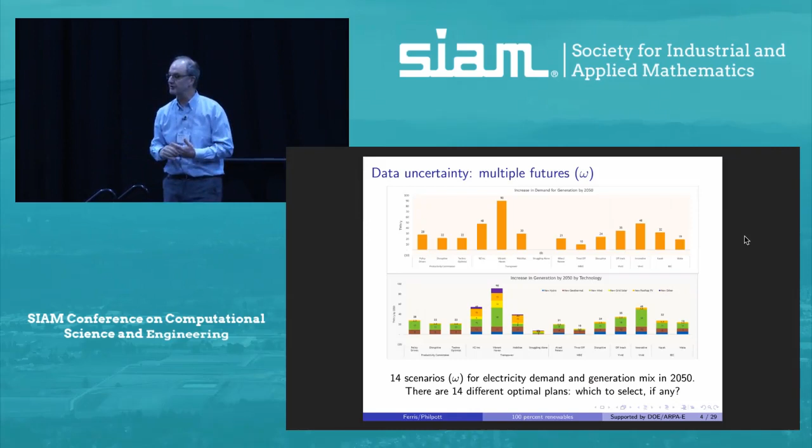Which one should we use? Well, my claim is that we should use none of those, but we should use mechanisms that essentially hedge against our uncertainty and take some portfolio of investments -- investments actually determined by an understanding of those multiple futures. And I'm going to use some techniques in stochastic programming to do that.

Second thing is, we don't know the data for 2050. We can estimate that data. What does the question mean? What does fully renewable mean? Before I talk to you about that, I'd like to first explain the picture on the bottom.

The context we were doing this in was New Zealand. You probably know that New Zealand is made up of two islands. There's the node S, which is the South Island -- the place you should go if you're a tourist, really nice, very green and hunky-dory. There's the Cook Strait, a bunch of water between the South Island and the North Island. Unfortunately, the North Island is where most of the people are -- about 40% live in Auckland.

Most of the electricity supply is a hydro electrical system on the South Island, so you have to get the water delivered from this large hydro system from the South Island to the North Island. The node H, you could think of as halfway -- it actually refers to Haywards power station, but it's across the strait. The orange lines are a simplified description of the transmission line network, corresponding to the places with the most congestion, because they have to run lines under the water between the islands, and there are other problematic lines between Haywards and the North Island.

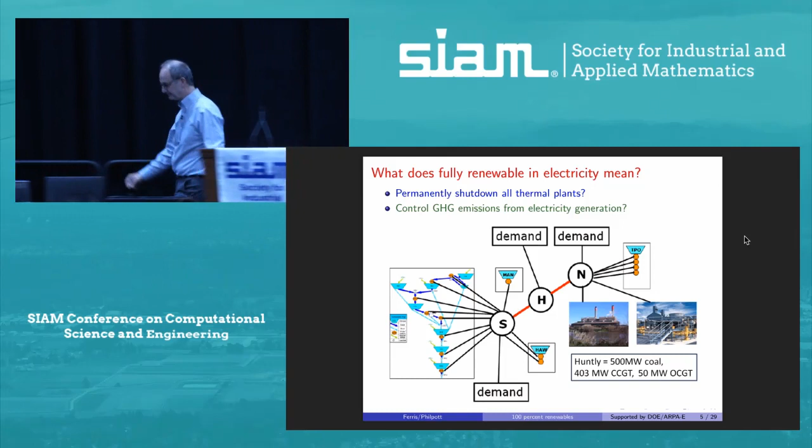So 100% renewable, well, we know what that means -- we want to get rid of these things. If we went 100% renewable, closing down all of the dirty plants is the same as closing down all of the emissions. However, if we want to go partway there, then these things would be different, and maybe they're different anyway. That's the question I wanted to address first in this talk. The first point I want to make is: because of uncertainty, closing down plants is not the same as reducing emissions.

So there are three pictures here, and the key point to understand is that hydro is like a huge battery. If we store the water, we can release it at a later date, and that's like storing potential energy from one time to another. So hydro is like a big battery.

Because of the uncertainty in inflows, there's a possibility of a really long dry winter. Because of the uncertainty in inflows, as well as demand, we might need to hedge. We need to maintain artificially high levels of water in the summer so that if we get a dry winter, we still have a reliable way to generate electricity.

So in the three pictures, the one on the left is full Huntly, where we don't shut down any of the plants. The middle is where we shut down the coal, and the far right is the picture when you've shut down all of the non-renewable technology.

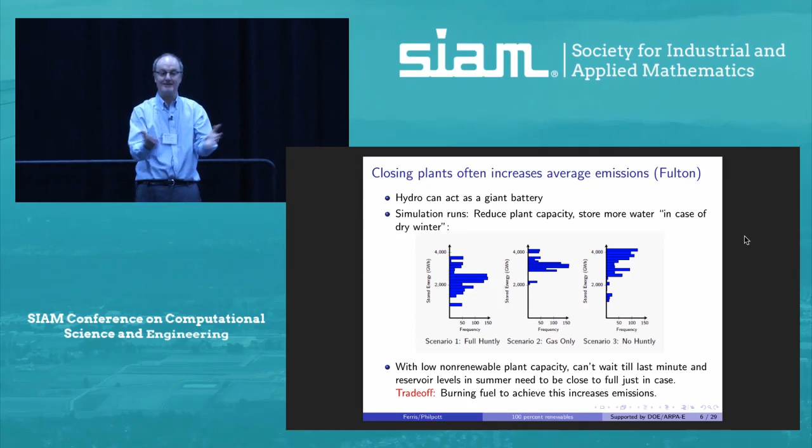The problem is, if you store water over the summer, that water isn't available to generate electricity. So you use your reduced dirty coal and gas over the summer to keep those levels artificially high, using the reduced capacity more frequently and ending up with more emissions.

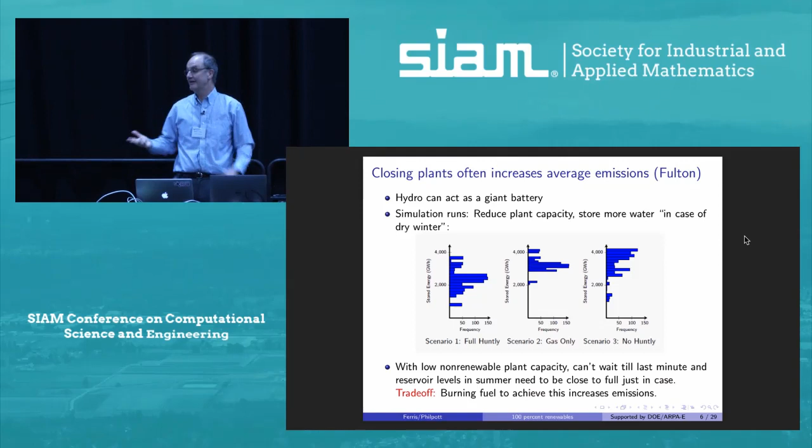This is the work of a bachelor's thesis out of New Zealand, Ben Fulton. The trade-off here is that we've burned more fuel to maintain a higher level of hedging—a higher level of water in our reservoirs—so that in the unlikely event we need it later, we have enough to generate electricity. And if it's a wet winter, we have too much, so we have to spill some energy or spill some wind.

So I've talked to you about uncertainty in demand. This uncertainty occurs at lots of different time scales. First, the uncertainty in demand or technology changes happens at the scale of years. I've then talked about inflows across seasons, which occur on a weekly scale. The uncertainty in inflows can be predicted on a medium-term scale of weeks.

The wind and solar generation are short-term uncertainties—typically we can do good estimates of those at the half-hour time scale. Then there are random failures: either a transmission line catches fire and breaks down, or there's a random breakdown in one of our generators. Those are random effects that occur at the second time scale.

So we have to span the gamut, all from seconds to years, and any model we generate has to be built with multiple timescales. Even for decisions at the yearly timescale, we need to model things occurring at much finer timescales, making trade-offs between investment costs at the scale of years and operational costs at the scale of seconds. Our model has to be informed by both of those extremes. We also have to worry about environmental regulations.

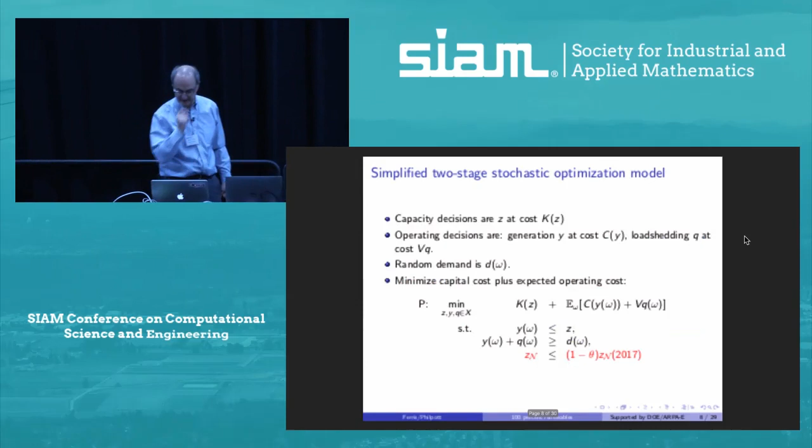First of all, I'm going to tell you about the major idea, using a simplified two-stage stochastic optimization model. I'm going to think about capacity decisions, investment decisions, how much Z I am going to have of each of these different technologies, and that's going to cost me K of Z. So that's a first stage decision: invest.

Once I've made that investment, there's some random demand, D of omega. Omega occurs in all of those random futures we've thought about. And then I need to operate at a level Y, so we have a constraint that Y of omega has to be less than or equal to Z. We can't use more than we have. With that assumption, we have a cost associated with operating that.

There's a problem: we might not have invested enough, so we have this trade-off between investment and operation. The demand might have risen so much that we have to do Q, which is a lost load. We might have to curtail some load, measured by Q. So what we'll do is penalize any lost load at the value V. It's a penalization problem—we actually have a two-stage stochastic programming problem.

We want to minimize the capital cost plus the expected operating cost in the future. That's the black problem—that's the economic and engineering problem. You could put all of your engineering constraints into this set X, so you can have those physical constraints. But in addition to that, what I'm talking about are environmental constraints.

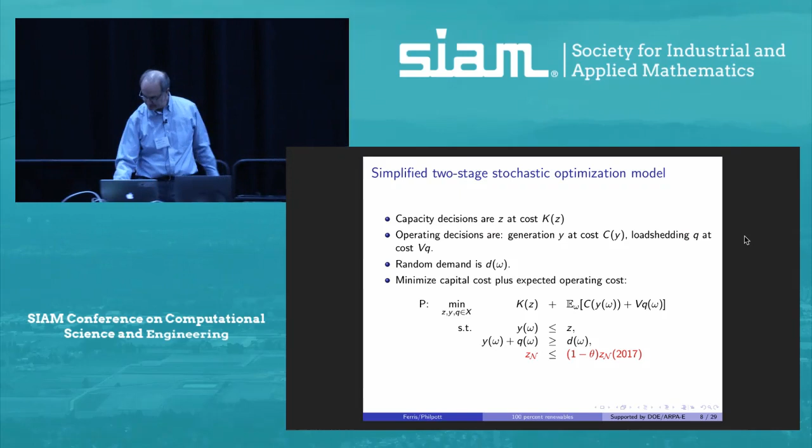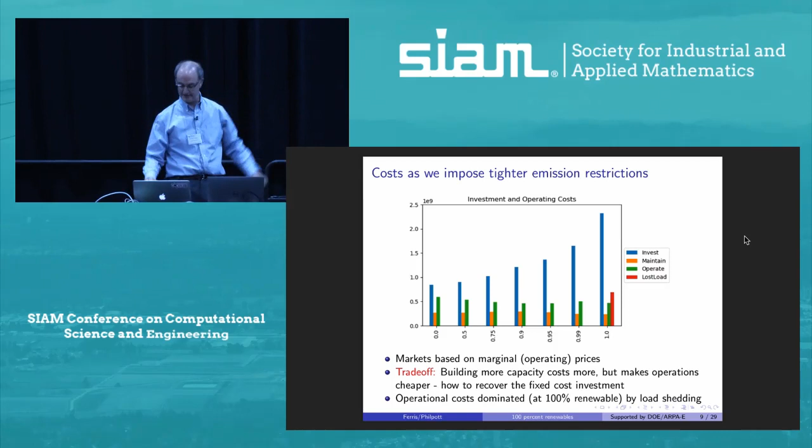Okay, I was lying. So for the next 5 minutes, I'm going to tell you a few more details about my simplified model. It's not quite as simple as it was. The ideas are the same, so I'm just going to explain the one model and tell you the highlighted parts.

The first part I'd like to tell you about is that the first stage decision variables are slightly more complicated. We have a whole bunch of different technologies. Each can be invested in at a level X and maintained at a level Z, and once you maintain them at level Z, you have different costs. Those are first stage decisions - we need to know how much we're going to install.

I like to think we've been fairly clever in thinking about another first stage decision, which is to try and capture uncertainty at that medium time scale. So a first stage decision, an investment in your problem, is an investment in capital and technology, but we also claim there's an investment in the level of the reservoir. You make this first stage decision independent of whether you have estimates about rain - you set your reservoir level, maybe deviating slightly, but it's a first stage decision made before you operate.

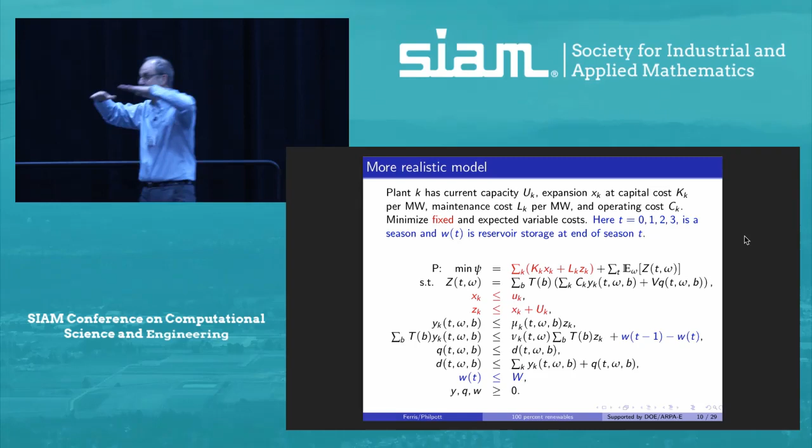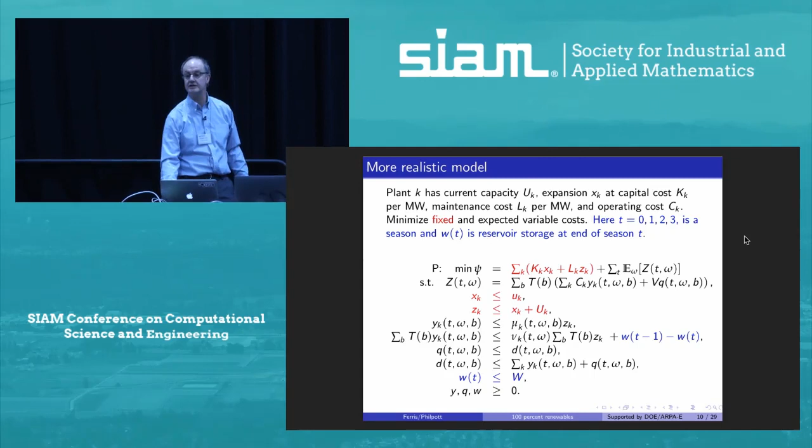So over seasons, I'm going to know where the level of my reservoir is. Those are first stage decisions, and I think this is a nice way of incorporating uncertainties at different time scales into a model. Second thing is the second stage.

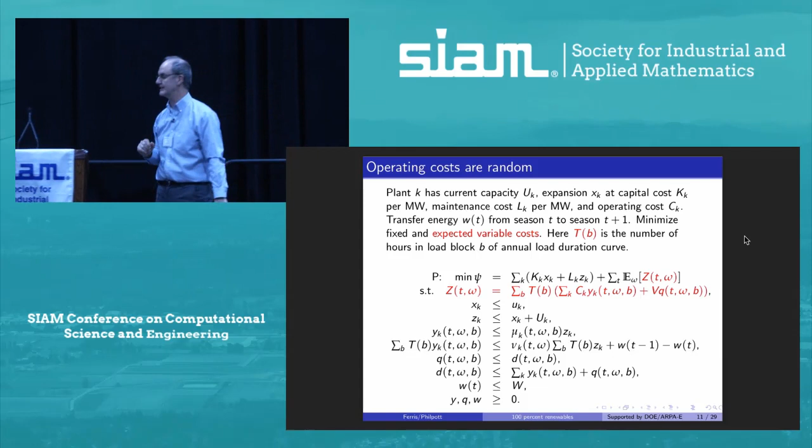Everything in the second stage here are random costs, based upon a quite complex model of a load curve, which we model using data. This T of B corresponds to different blocks of our load curve - you have peaking plants and plants addressing base load, stuff which is always on, and stuff which happens because everybody drives home and plugs in their electrical vehicles at the same time. So we can model things like the duck curve from the California electricity industry using data within these load blocks and T of B.

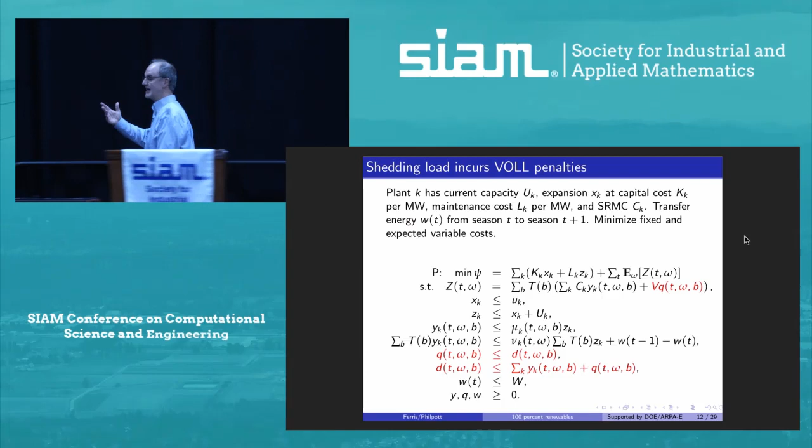The third thing, as I've already talked about, is shedding load. Shedding load occurs because we don't have enough installed capacity, and we do that at a penalty V. So we understand that if we don't install enough, or we get some bad scenarios, then we might have some trouble.

The third thing I want to think about is how we deal with uncertainties at smaller time scales and the difference between wind and hydro. Wind and run-of-the-river hydro - run-of-the-river, I can't control it, water in is water out, I generate electricity there. So we have a constraint on the capacity of the wind. That mu factor depends upon the load block, and will be demonstrated to be different across each of those load blocks. It's not a standard formulation, but frequently the wind doesn't blow in the peak period.

That comes from historical data. So we generate these scenarios or futures in these mu's based upon different data which corresponds to the capacity constraint - how fast can you generate the electricity? That's a random effect which is at the half-hour scale.

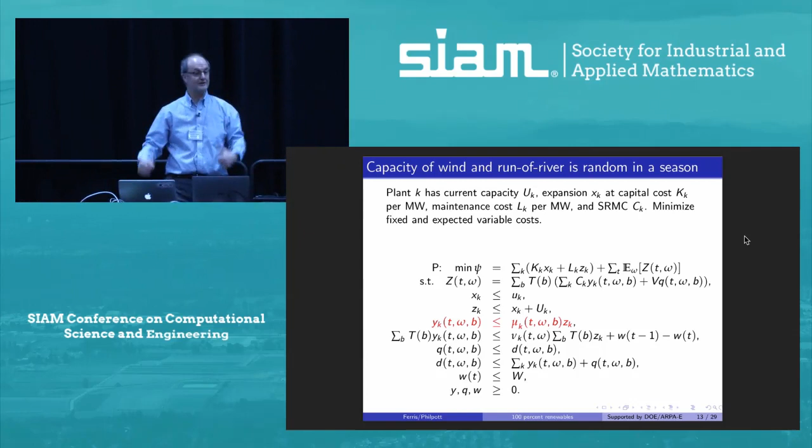There's another effect which is the dry winter, and that's at a different time scale. You can think about it as an energy constraint, an integral constraint, so we actually have to sum up here - we take an average here, so it's some form of an integral. The uncertainty that occurs here are predictions of whether it's going to be a dry year or a wet year, a nasty year or a good year.

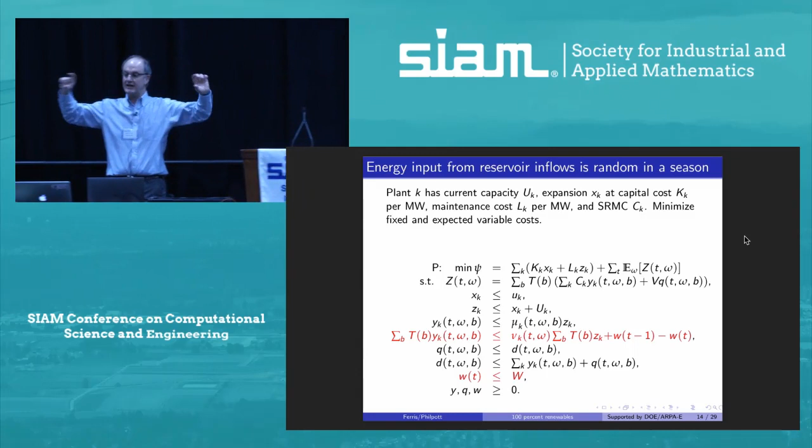Okay, so we measure both of those, and both of those things are captured as different types of constraints, and in a planning model, they're associated with this.

Does it work? Well, I'm an optimizer, and so if I impose the constraint that we actually want to reduce the CO2 emissions, if I manage to solve that problem, having enough technology or enough ability to build new technology - yes, it works. We can drive the CO2 emissions with a CO2 constraint down to 0. Hunky-dory, so it works, bully-ho. Okay, that might not be the right constraint.

Those are averaged or expectation constraints. You could think about those constraints, as a mathematician, as imposing them on an almost sure basis - so instead of imposing them in expectation, imposing them in every single scenario you ever see. We found that this didn't actually make a lot of difference in our runs, but that's part of the model that you could experiment with if you like.

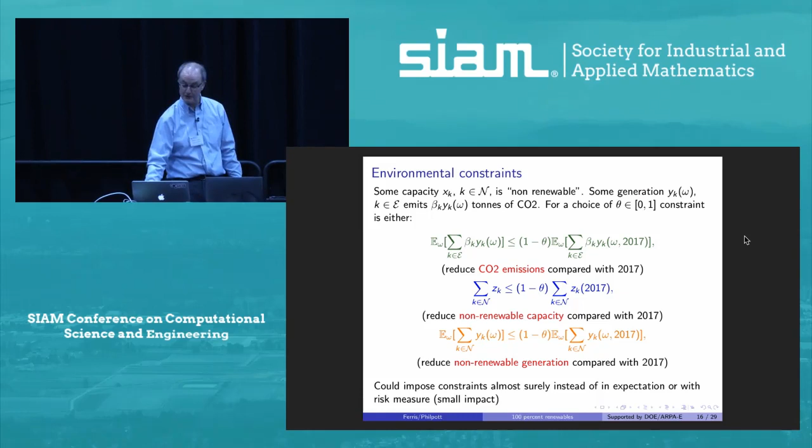So if we do that, then instead of just the green constraint, which goes down, that green constraint is now augmented with the blue - the capacity reduction - and the orange line, which shows how much emissions we get if we do overall energy reductions. So we actually operate the things and reduce the non-renewable energy that we're using down to 0. The green works hunky-dory - we already saw that.

The problem is that they've changed the rules. If you change the rules and say that geothermal and carbon capture with storage - these nice green technologies that capture the carbon as it comes out and store it under the ground - if you say those are now renewable technologies, then they still emit carbon. So we can do this with the blue constraint or the orange constraint, but the net effect is that you actually just get a fairly modest reduction in CO2 emissions, not the emission to 0 that you would like if that's what your problem is. So be careful for what you want or how you do it.

If you impose the constraint explicitly - so in the optimization you model what you want to do explicitly - you can do it. If you model it by a surrogate, by an action like closing down plants, for example, then you might not get the desired effect that you're after.

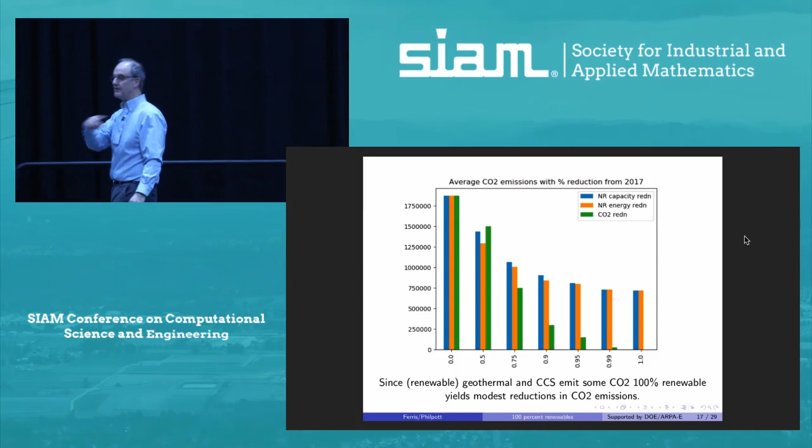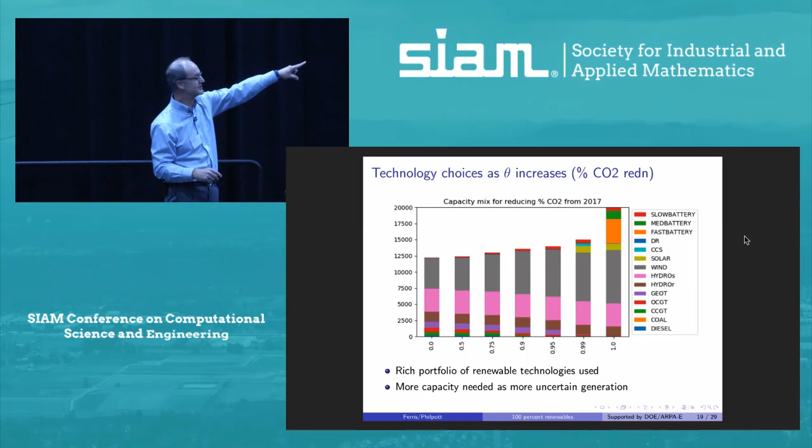If you actually want to impose the green constraints and drive CO2 emissions down to 0, then the capacity mix becomes much more of a rich portfolio. You end up with lots of different types of batteries - we split batteries into slow, medium, and fast batteries. Different technologies that all of you are inventing are very effective at dealing, at higher cost, with delivering electricity more quickly. And as you see, as we drive to 100% renewables, we have some big increase in wind.

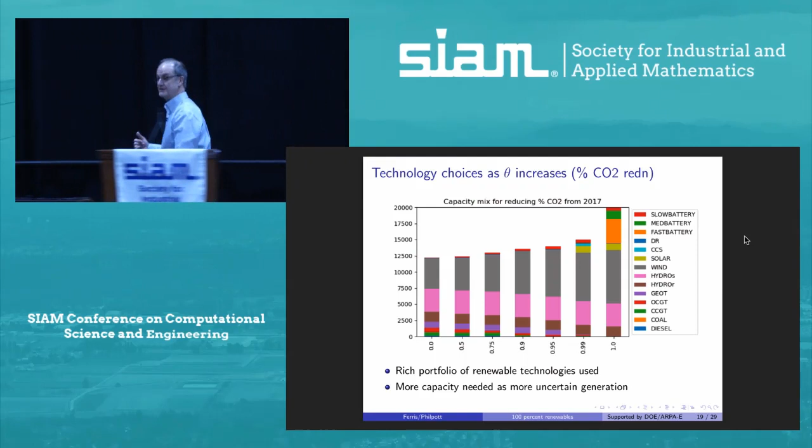We finally have some penetration of solar at high levels of renewable - 99% or 100% - and we actually impose these batteries. All of this is hunky-dory, except you see that the capacity I have to install actually goes up, and this is now becoming expensive because you have to install more capacity. How much does it cost? Well...

So we have a constraint. We're all mathematicians - we have an optimization problem with a constraint in it. We can put a Lagrange multiplier on that constraint. This is called the carbon price.

And then we can take that carbon price and that constraint and lift it up into the objective function. Instead of parametrically changing the right-hand side of the constraint, we can parametrically change the carbon price. So now on the bottom of this graph, I have the carbon price in dollars per megawatt. This is hunky-dory - this picture should look the same as the other picture. That's what the theory says.

Well, the problem is that the actual multiplier and the constraint are related directly, but the actual functional relationship is not good - I don't know what function represents the multiplier corresponding to the right-hand side constraint. But they correspond to have the same picture, and we end up generating things.

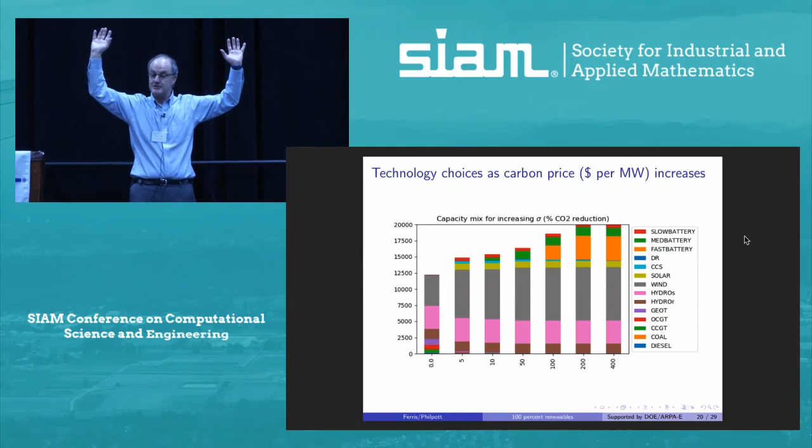The news is good, because what the people in politics will say is that a carbon price of about 50, which is about the fourth graph, is actually reasonable. But if you want to go to 100% renewable, that doesn't occur until you set the carbon price to 400, and the politicians will throw their arms up in horror and say this is not possible. So the use of the Lagrange multiplier within our models is actually a useful policy instrument to understand exactly how these models can be used in a policy environment.

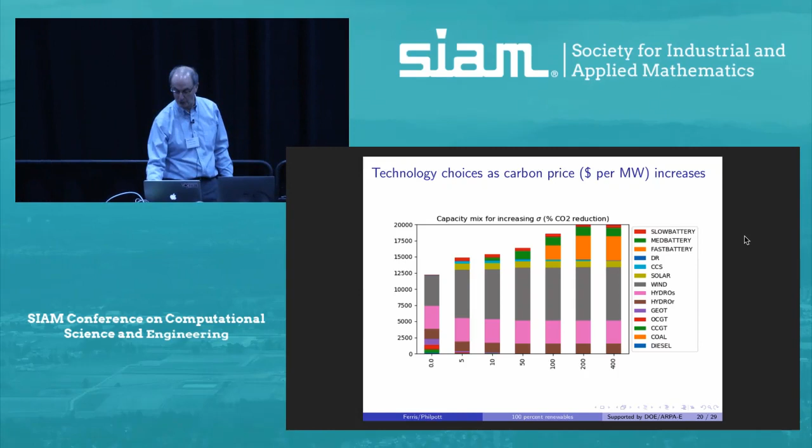The underlying models can actually provide value and also help us understand what technologies are useful and what technologies aren't.

Some of my other colleagues would say, let's think about this slightly differently. Let's not put the constraint in, but think about a chance constraint. Remember, the policy said we need it to be 100% renewable in a normal hydrological year. So what does that mean?

One way we could think about it is you look at the years, and for the lower 50% you need to have 0 emissions, and for the other 50% you couldn't care less. So the probability that you satisfy the constraint has to be bigger than or equal to 50%.

Chance constraints - super duper, we know how to do that. Integer programming will solve that, and we come up with this distribution. This is the distribution that, for one interpretation of what they mean by a normal hydrological year, actually gets a solution, and these are the technologies that you actually build.

Unfortunately, compared to the 99% renewable case, this chance constraint involves a 60% increase in emissions and a 20% increase in cost, so it's inefficient compared to the 99% renewable case. The advice to the Climate Commission is that this is not necessarily a good way of modeling or thinking about these problems.

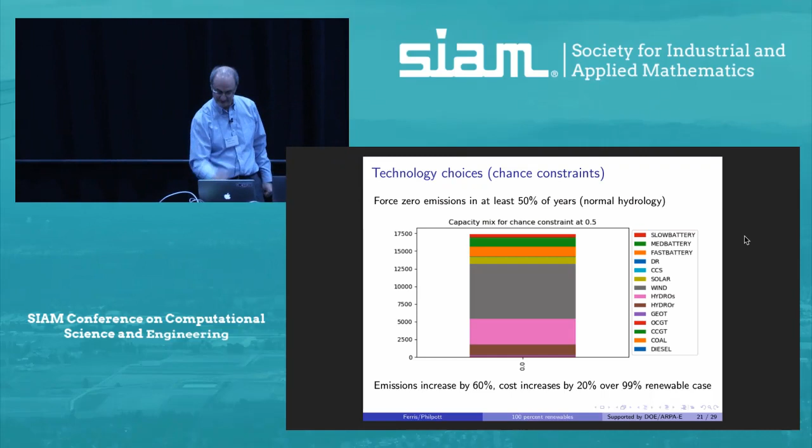Another thing people might want to do is think about expectation. I talked about first stage and expected or average cost. But often in industry, industry is risk averse, so they're worried not about the actual average cost but about big, expensive costs which come out in the tails of our distribution.

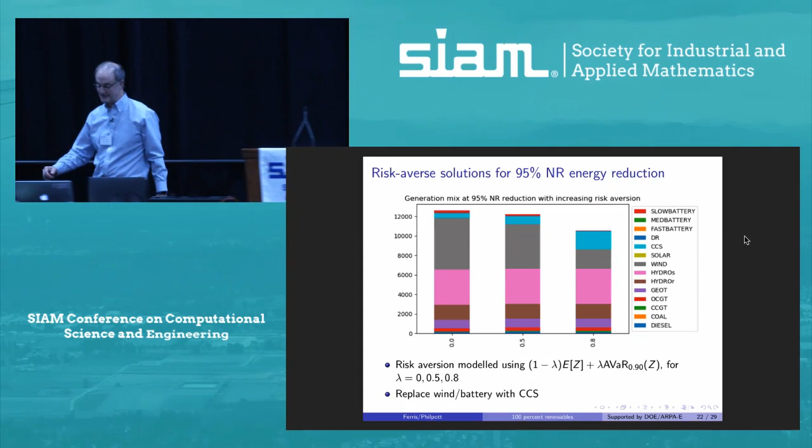So I can discuss this with you offline if you want. How much does it cost? What's the bottom line? So the bottom line here is that, as we saw, if you do blue or orange and don't really worry about the emissions, then the cost is fairly constant.

So there is some increase in cost, but that increase is very constant. When we go without geothermal or CCS, we actually get a fairly steep increase. So the last 1%, or maybe the last 5%, of increases or decreases in non-renewable technology are expensive. You can actually quantify for the planner the physical cost, and those numbers are useful - you see them raise their hands in horror, their eyebrows raise up, and wonder how expensive this is.

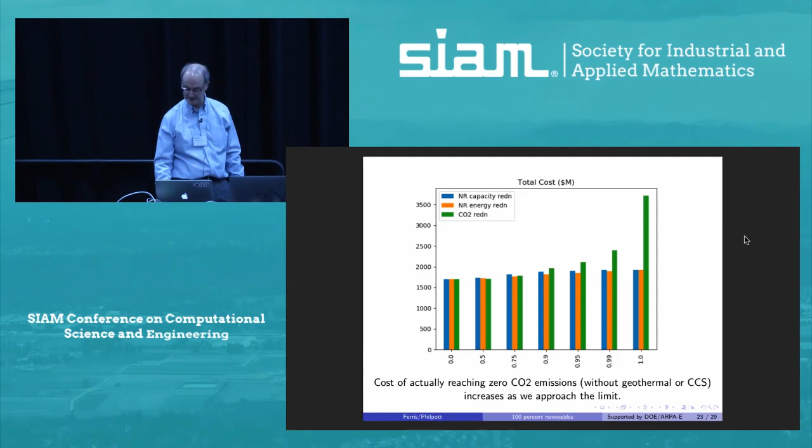I'd like to think about whether this is a good idea. So is this a good idea? Well, let's look at New Zealand. New Zealand, on an average year, emits 80 million tons of CO2 equivalent.

Of that CO2 equivalent, about 45 million tons comes from the agricultural sector. That's not part of our problem. Somebody else has said, well, you can't touch that. Agriculture is too important to New Zealand, too important to Wisconsin. You can't do that. You have to leave that alone.

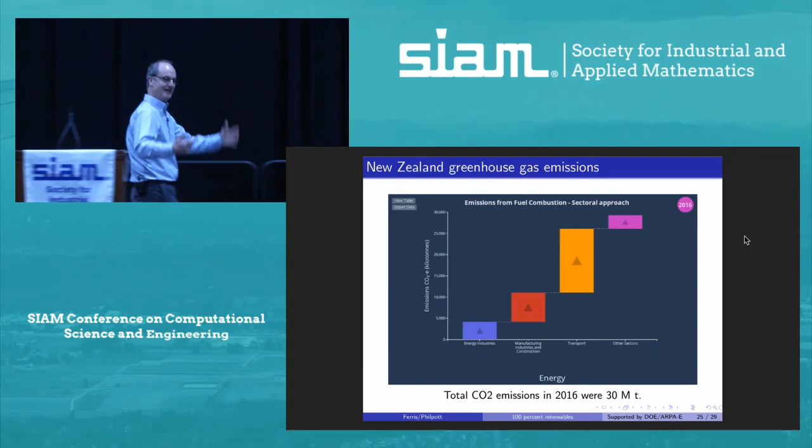So we're left with this 30 million tons, which is the stuff we can think about, instead of the 80 million tons. Well, actually, we don't even have the 30 million tons, because that's about fuel combustion, and of that fuel combustion, about 15 million tons come from cars. We can think about electrification of that yellow area, as some of the models and results I've shown have talked about.

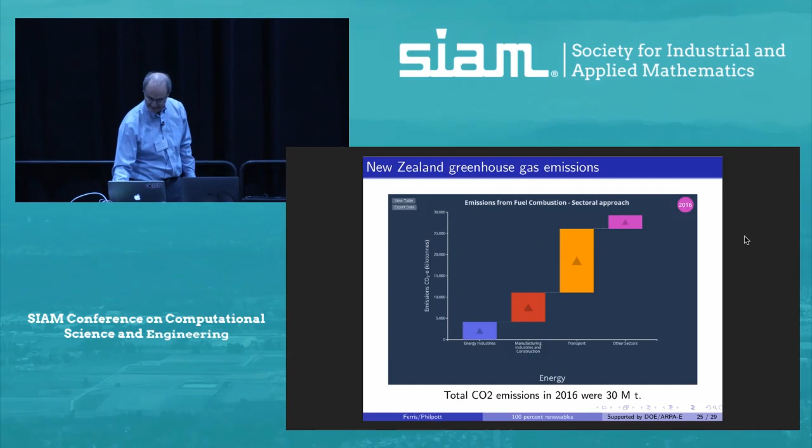So electrification of our vehicles moves them from fuel combustion into the little blue container at the bottom. We can move some of that demand by electrification of vehicles into our blue thing, and then it does become part of our problem. The results I've shown here have been built based upon models like that. However, even within that blue area, even if you add a little bit of vehicle electrification, there's still petroleum refining and some other stuff, so you end up with 3 million tons in the electricity sector.

3 million tons out of 80 million tons. I'm solving the problem, I have to get rid of 100% of that 3 million tons, but forget about the other 77 million tons. That's not my problem. I don't think that is how we should be proceeding.

And I think this is how the mathematics can actually be used. I believe that in the future we should be thinking about some general equilibrium or methodology to take those consumers, which we're thinking about as consumers of electricity, and bring in other sectors to these models, like the agricultural sector, combined with the sectors we have for demand of electricity or demand for transportation.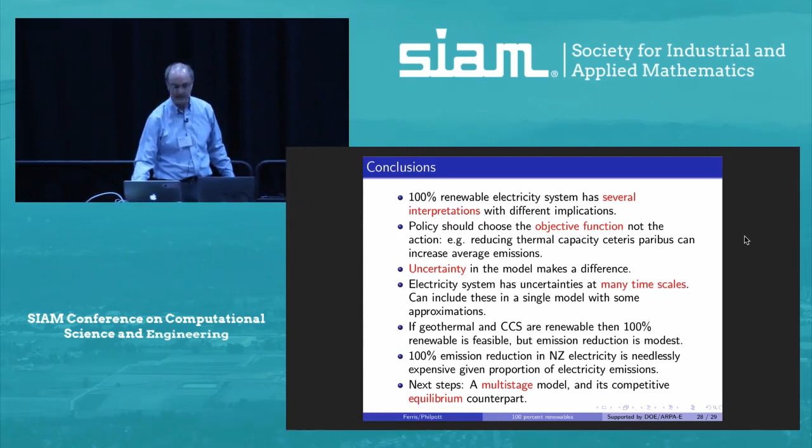The model I had was a two-stage model. I think this model can be extended in the future to be multi-stage. We don't make investments now and never make investments again until 2035. These are stage investments; multi-stage would be appropriate. We don't actually have one agent controlling every single generator in the United States or in New Zealand. These are market-based companies, and modeling competitive equilibrium, not only for sectors but also within the energy sector, would be useful. That's work we intend to do or have already embarked upon, and I can give you pointers to papers on that if you like.